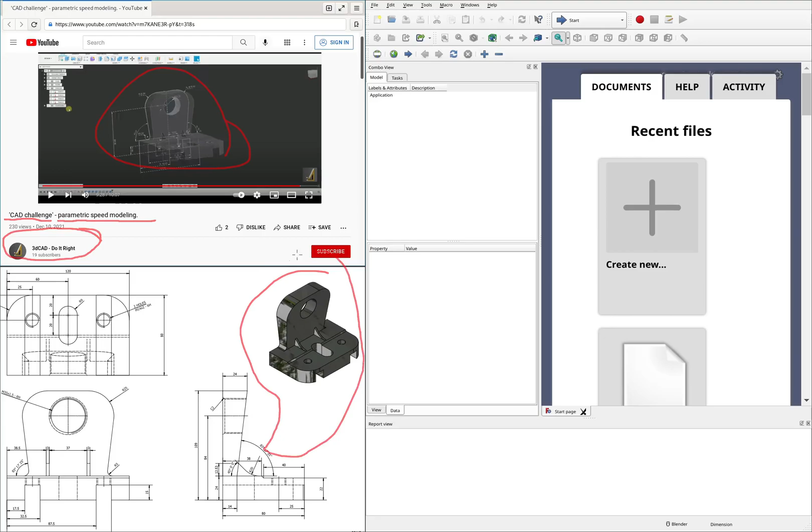Now, while I was browsing the internet as one does, I stumbled upon this video on YouTube by Do It Right 3D CAD, a CAD challenge parametric speed modeling of this model here. And I've got the drawing pulled up down here on this lower window. And I figured that we'd go through this one today. It's a little bit more complicated than our normal models, but overall it's still a relatively simple model, just kind of funkier angles.

So before we get started here, some things I'd like to point out: they're using this notation here. So this is the degrees, minutes, seconds notation for an angle as opposed to a decimal. But this is a relatively simple conversion. So this one would be 83 plus 17, and then minutes in a degree, there's 60. And then seconds in minutes, obviously there's 60 there, plus 25 times 1 over 60 squared. So that's one interesting thing I noticed here right off the bat.

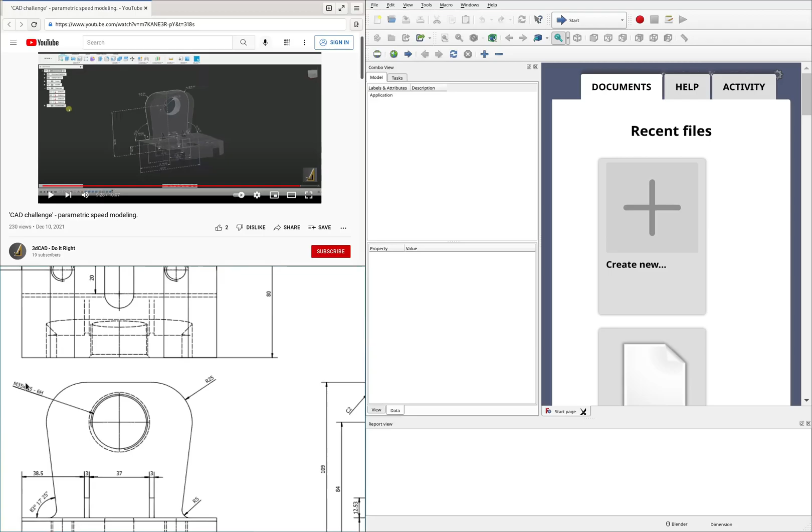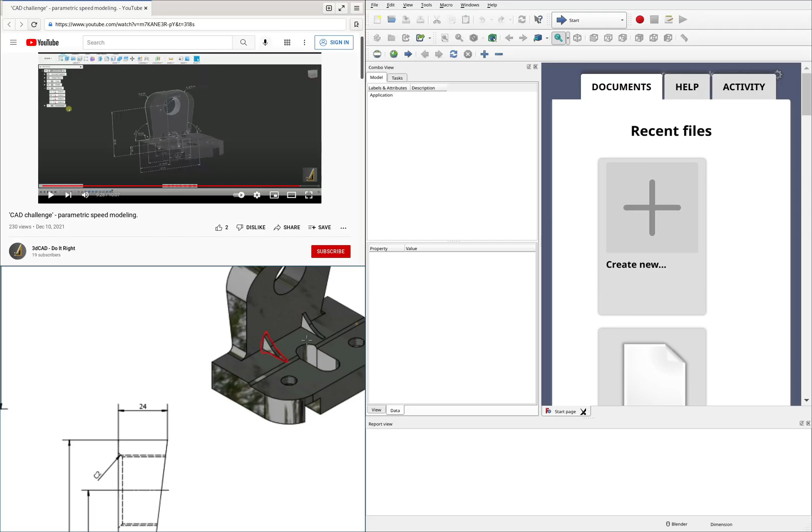And the second interesting thing I noticed is these holes. So the holes themselves aren't interesting, but there are holes. So that gives us a nice opportunity to show off the FreeCAD hole tool. But overall, this is a pretty straightforward sketch, pad this way, cut that way, cut down from the top, and then some extra little bits, three holes here, and then this extra kind of mirrored pocket thing. But overall, shouldn't be super complicated.

I guess since this is a speed modeling challenge, he was able to do it in 10 minutes and 7 seconds. So I guess we're competing here. I'm pretty sure we're going to lose. He did it in 10 minutes and 7 seconds with Fusion 360. So we'll see how FreeCAD compares. I feel like it's going to be pretty good. This seems like a model that doesn't hit any of the hiccups that FreeCAD ends up with.

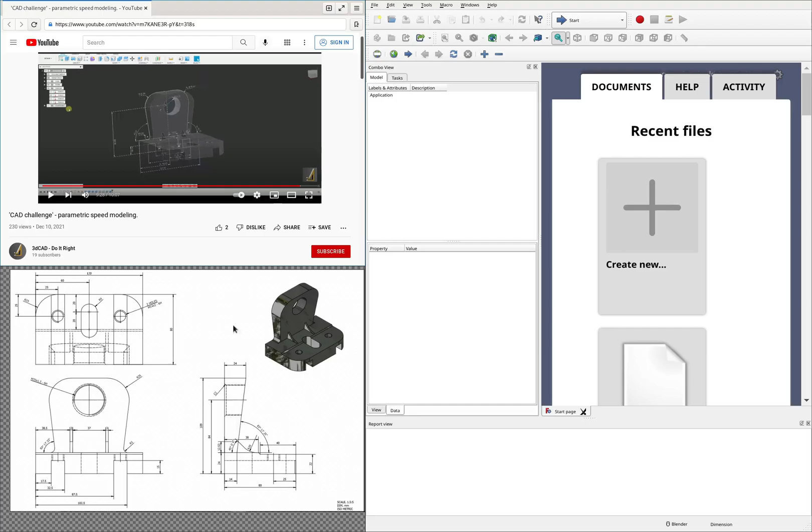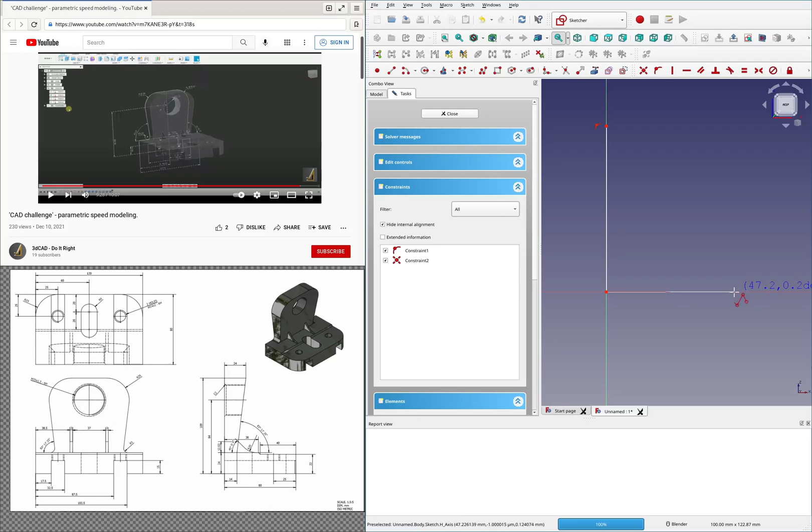So go ahead here and create a new file, switch over to Part Design, Body, a sketch, and grab here. And I'm just going to start a sketch from the side. Let's see, got this, and then we've got kind of this funky jump over bit, and that should be good. Horizontal, horizontal, horizontal, already horizontal. You're good. The overall height is 109. Oops, except I did the wrong button there.

Height 109. The overall width is 80, and then let's see, distance from here to there is 14, and the distance from here to the origin, guess I keep selecting that line there. There we go. This one is 38. And then this distance here is the next one at 40. Let's grab the overall height here at 22.

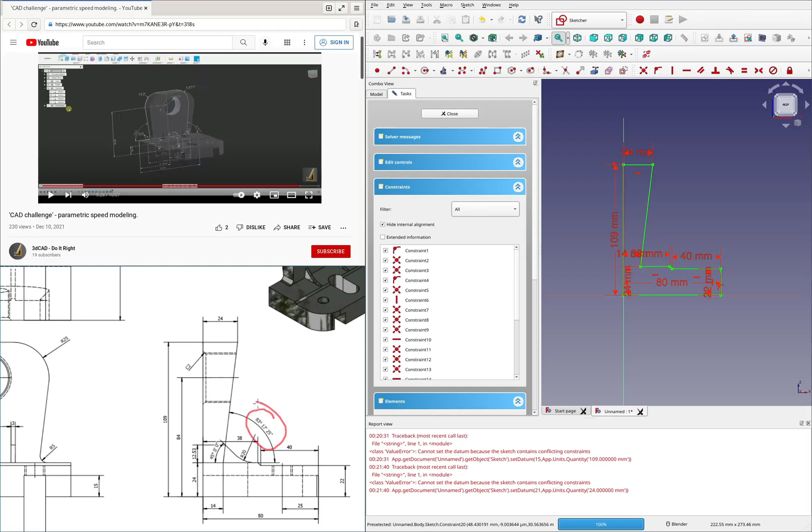And let's see, the height here is 24. Oops. Once again, clicked the wrong button. 24, and then this piece here is also 24. And I guess their dimensions here are kind of interesting because this one ends up being unused since it's over-dimensioned. So I guess we got to skip that calculation there. Kind of nice. That would have cost us some time in this ultimate speed race.

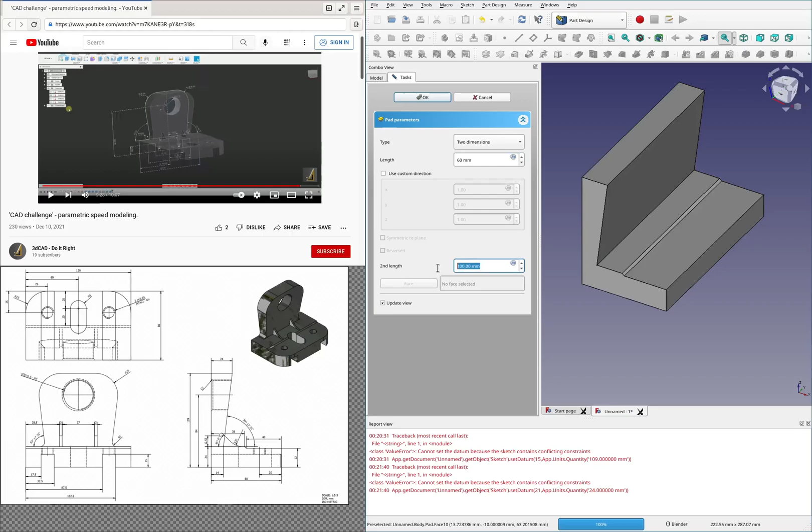We're going to do 2 dimensions here so that it ends up in the middle. And if my calculations are correct, 120 is the overall. So 60 in each direction should work out pretty good. Okay. So then moving on, sketch on this front face, we need 2 boxes. And these are the same height, I believe. And dimensioning all of them from this top corner. So from here to there is 17.5. And then from this one, let's see, a 32.5.

The third out of the four at 87.5. And the fourth out of the four at 102.5. And then the overall height at 15. Okay, and then while we're at it here, we will grab this one and sketch out the other bit. Okay, so that's sketched. I need some fillets. Fillet, fillet, fillet, fillet, and make these 2 equal and the other 2 equal. And the radius on the big fillet is 25. And the radius of the small fillet being 5.

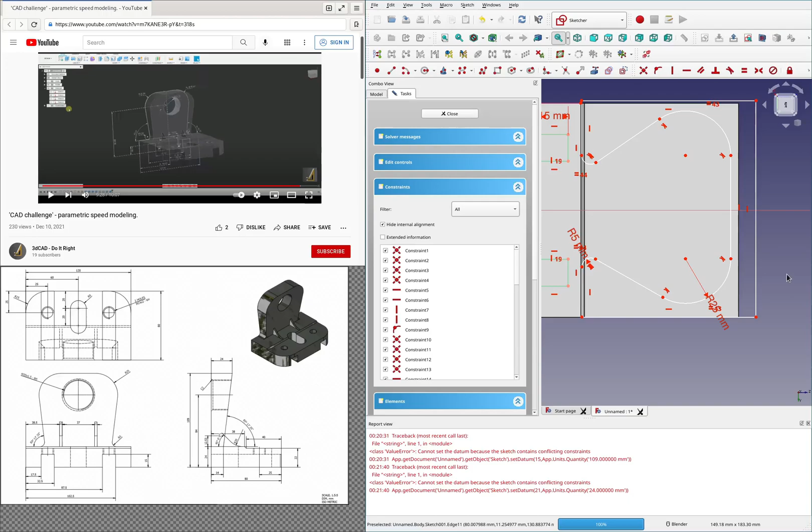Okay. And I suspect that these are all symmetrical, so go ahead and make those symmetrical about this center axis. Alrighty. And this one here needs to be coincident with the top. So I'll grab the top here and do a point on a line constraint. And then this one here needs to be coincident with that corner. So grab that corner. And this one, we can use the symmetry constraint once again. And then I'm just going to give it a little bit of an offset here. Sure. And that's just to ensure that we have an actual pad that can be padded as it would be. So let's see what we're looking at here.

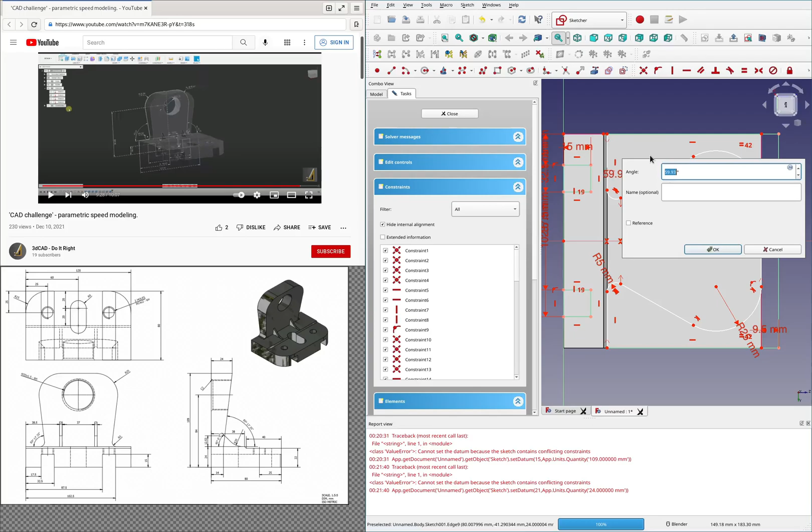We're missing the angle. And this is one of those funky angles. So this is the 83 plus 17 times 1 over 60. And I'm not going to bother with the rest of it because that's so small it doesn't matter.

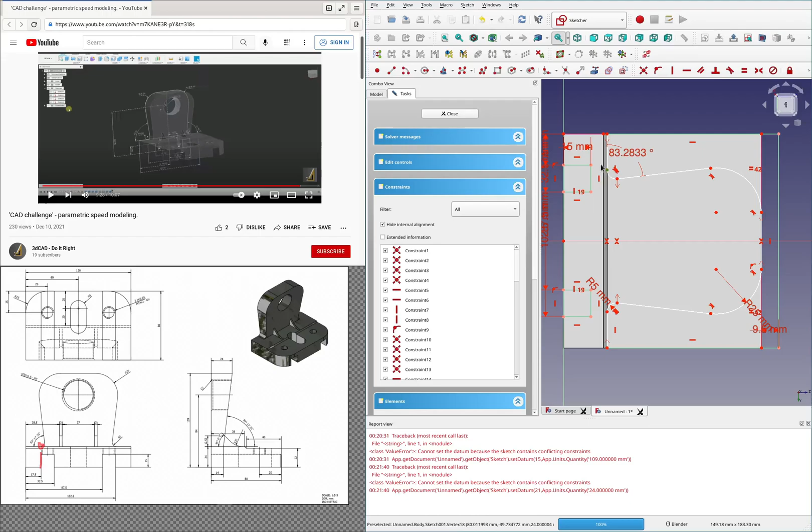Okay, and all we've got left now is the in and out bit. And let's see. I'm not seeing any dimensions that immediately dimension this thing. But I guess we will line up this corner here with this little cutout there, and if it ends up being something different, then we can deal with that later. So then I'm going to go pocket through all.

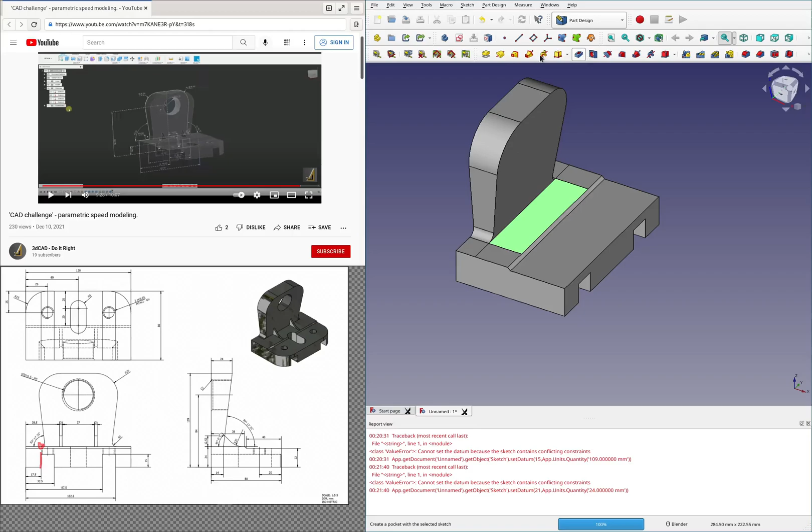Okay, and then we just need one more sketch here from the top to do that bit in the middle. So I'm going to grab the tool for that, put it down, okay. And the radius on that is 9, and it's dimensioned from the other side, so we will also dimension it from the other side, horizontally 20, and then center to center of 20 also. Okay.

See through all. Alrighty. We got some fillets here on the edge of this body, and they are, let's see, 25 in radius. Okay. And let's see, what else do we need to do? So we've got to do the little pad bits here. So I'm going to do a plane for those, and they are 38.5 from the edge, 38.5, and that is in the wrong direction, so negative 38.5.

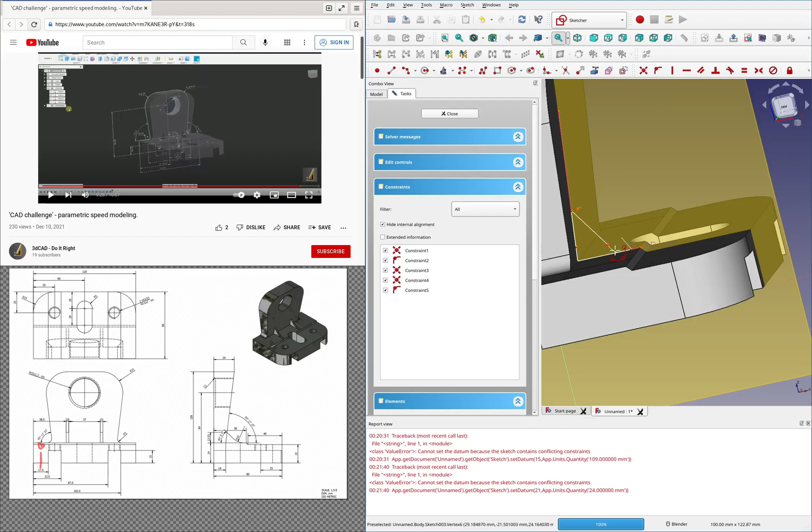Okay, so sketch here, need to grab a few faces, this one, that one, and I think that is it. And let's see, do this, this, and oops, it appears that bottom one is actually an arc, so we'll do that one separate. I don't see an easy way to use the fillet tool to make it. Right, tangent, this, that, tangent, this bit and that bit, I believe are coincident. Yeah, they appear coincident, and I don't see anybody dimensioning to this particular arc.

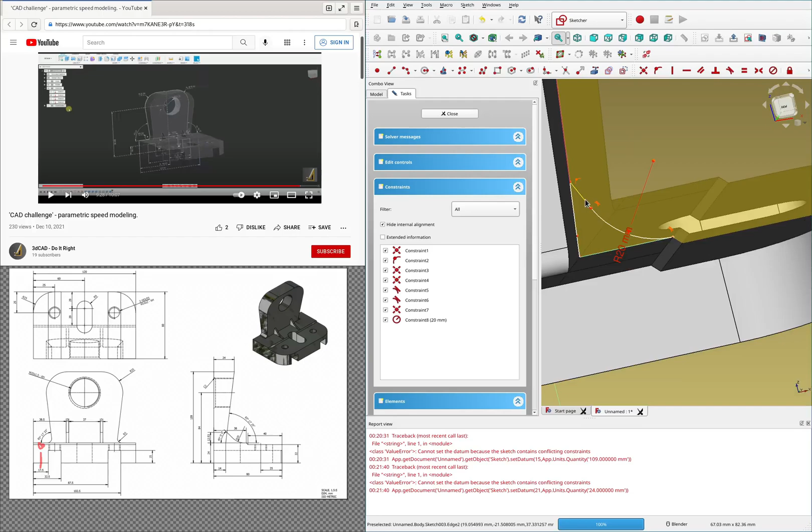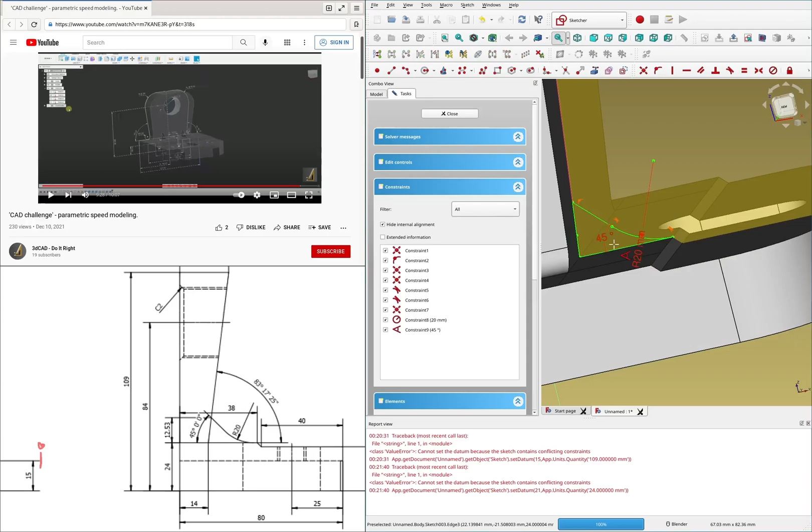So a radius of 20, and then the angle here is a 45. So come over here, grab the angle tool, and that is not the right direction. So we'll pull that down and hope for the best. Okay, 45. Alrighty, we pad that. It's going in the wrong direction. And this is, let's see, 3 thick.

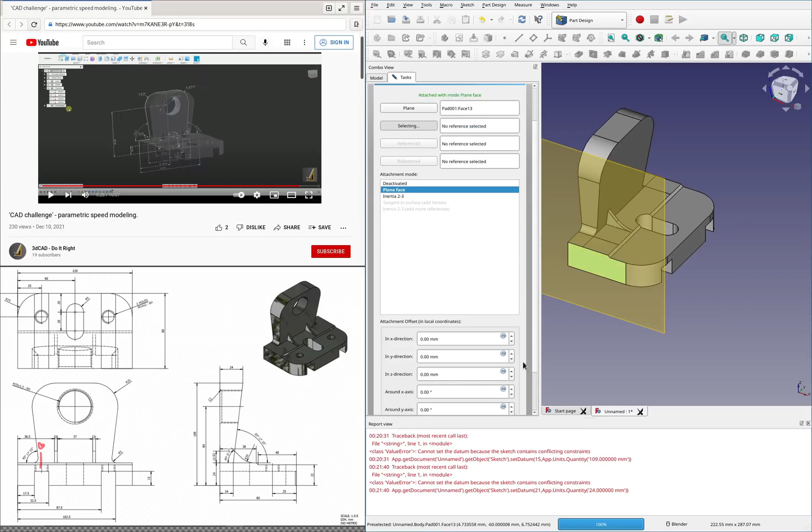Oops, 3 thick. Alrighty, hide the plane, and then I will come over here, grab a second plane, and offset it by negative 60. Makes it a mid plane. Or actually, I don't even need this plane. So we'll go ahead and delete that. I'll just bring back my origin, and I want to grab the pad and a mirror, select reference this way. Okay. So then all we have to do is the holes.

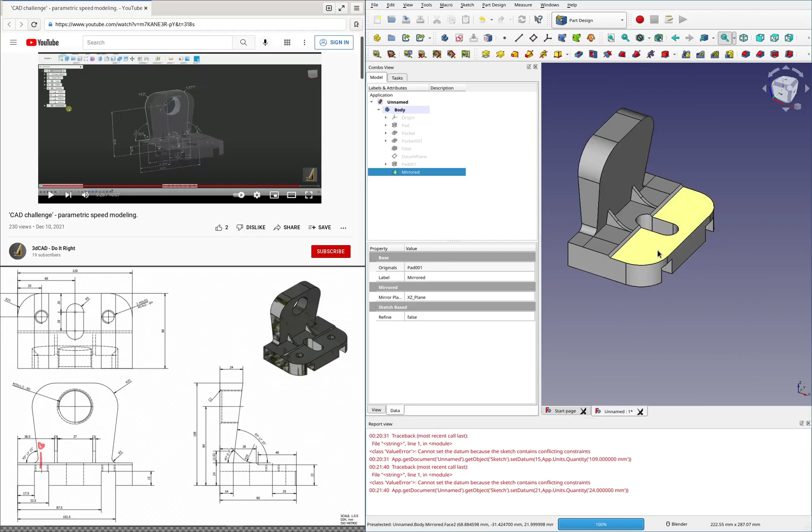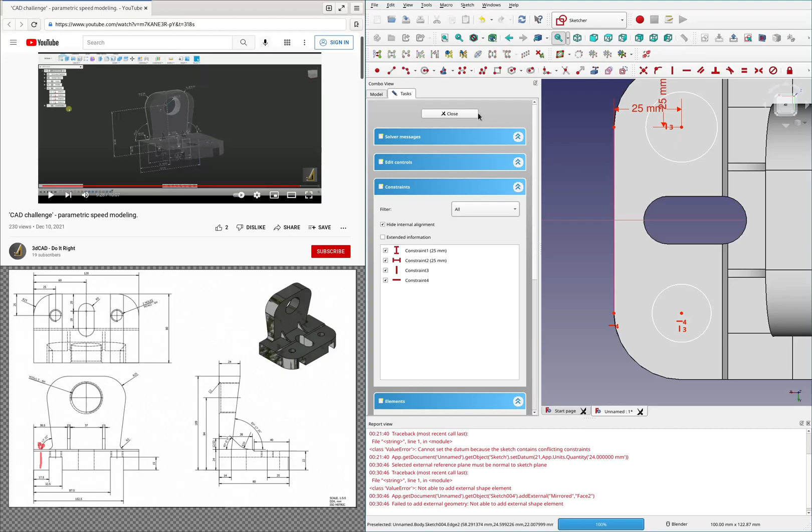So I grab a sketch here, and I need 2 circles, and they are dimensioned, let's see, they're dimensioned from the edge of this bit. Here, here, alrighty. So the vertical dimension of 25, the horizontal dimension of, let's see, also 25. Oops, I got my dimensions there mixed up. Luckily they were the same. I guess that puts it concentric with the fillet on the edge. So we should just be able to do those 2 as horizontal and should be good. I'm going to leave the rest of that undimensioned since it doesn't matter.

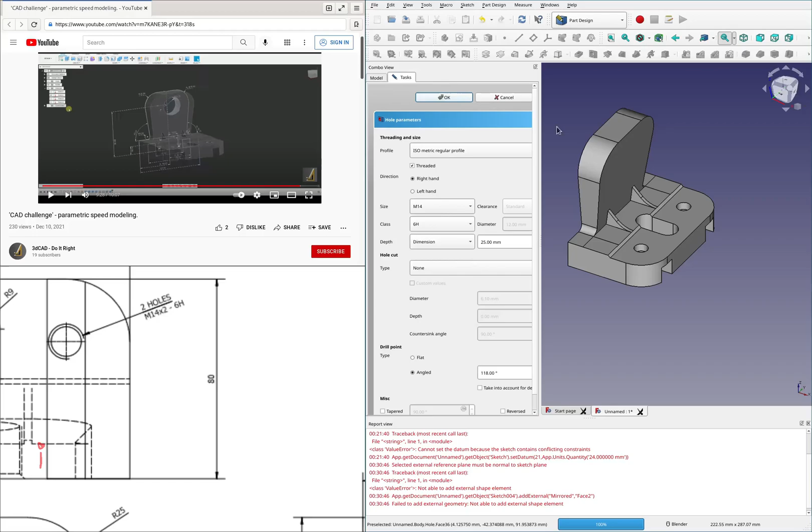And for the thread tolerance, let's see, this is a M14 by 2. M is an ISO standard. So let's see if we can find this here. 14, looks like we don't have 14 by 2, so we'll just settle for M14. Threaded 6H. Okay, and then we've got one more here. Grab a sketch, circle, okay.

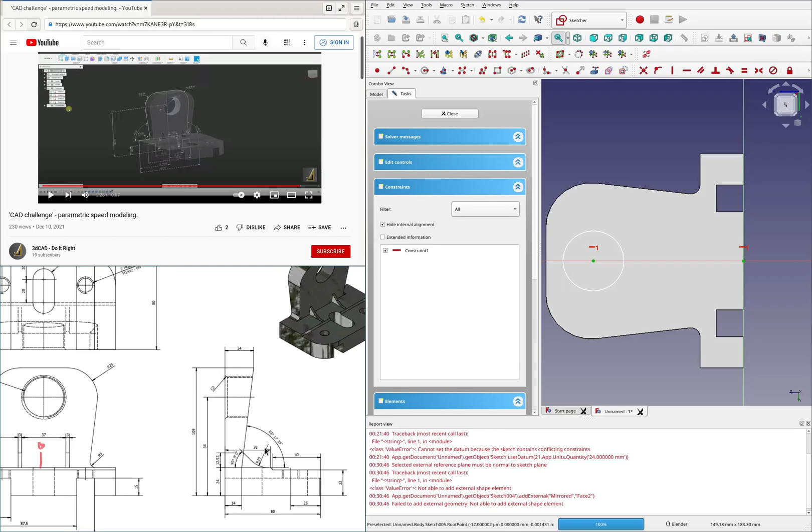This is in the middle, and it is, let's see, not a great dimension to a hidden center line, but 84. Horizontal 84. And grab the hole tool. This is a, let's see, an M35 by 1.5 H6. Fine thread M35 by 1.5 H or 6H.

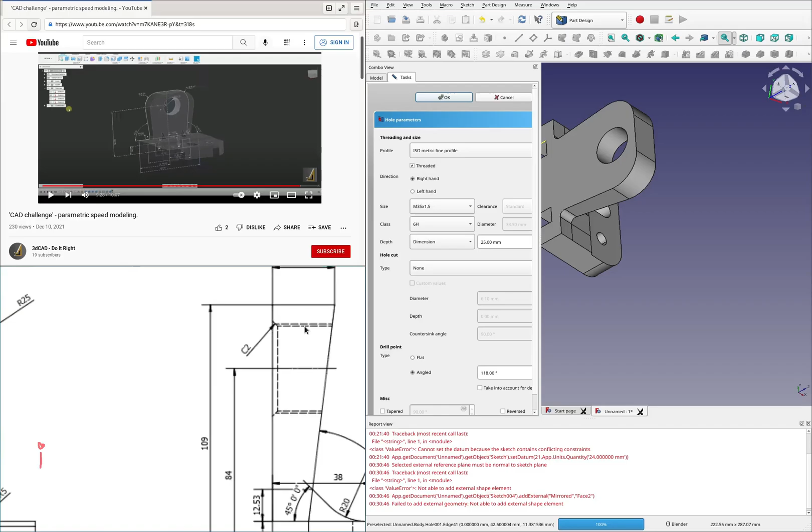Seems good, and I think I recall seeing a counterbore here. Normally I would expect this to be on the hole callout. I guess this would be a countersink. And depth of 2. Okay, check. And I believe that is everything.

So we'll check the time. I feel like I went fairly fast. I still expect that I didn't quite get under the 10-minute mark there. I guess I probably should have timed myself, but we'll see the time in the recording. You won't get to hear my thoughts on it.